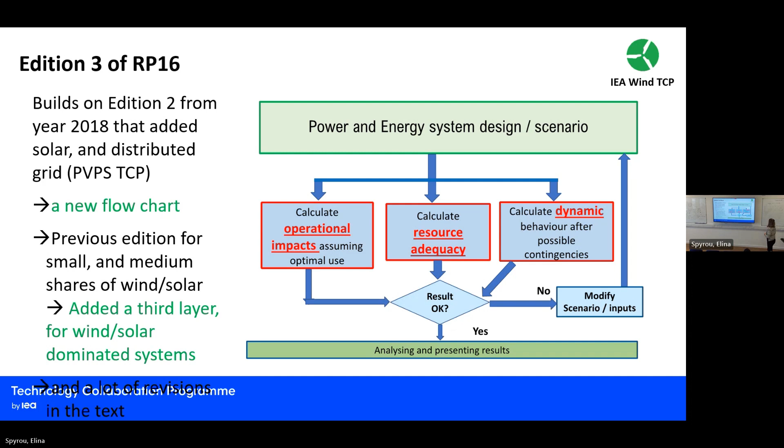Now, would you say you are doing some of, or part of, these boxes in your research? Yes. Are you doing operational? Dynamics, yeah. Resource adequacy? Anybody doing that, or no? Yeah? Okay. And are some of you actually doing more than one box? Or, usually I would say students would focus on one of these when they make their research. Also doing a bit of linking dynamics with steady state operation. That's right, so yeah, that integrated approach. Yeah, yeah, that's right.

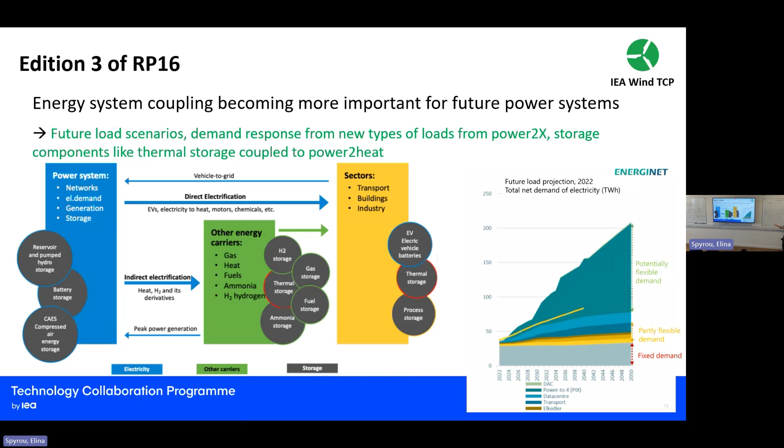And this is just a picture from Denmark, where they look at how they see things towards 2050, and how their demand, which is now quite small, less than 50 terawatt hours a year, will evolve. They just put: okay, most of the current demand is fixed also in future, and some of it is partly flexible. But a lot of the new demand is potentially really flexible. It is only potentially, because we need to check. Data centers are a bit of a problem to really push to be flexible, whereas many others, like hydrogen derivatives, will probably be operated so that when there's scarcity of wind and solar, they will not operate. So it's a different type of thing.

And then another thing generally is that we have these model tools that are quite different.

If you try to model something for policy and planning, and then move toward techno-economic plant performance and unit commitment—which is normally what these studies do—they are somehow linked to the policy targets, checking whether it works out. Then you go to network power flow and system stability, and often we see at least some linkages or inputs coming from the higher level models. What we don't see so much is a feedback coming from the more detailed studies back up.

System stability linking to power flow, the steady state, is being done more and more. But actually going back to, for example, capacity expansion tools to check that a scenario had feasibility issues, and then going back—this is something that needs to be done more when we have higher shares of wind and solar. Or jumping in a different way to say, okay, for stability reasons you need to change your policy. Maybe in future.

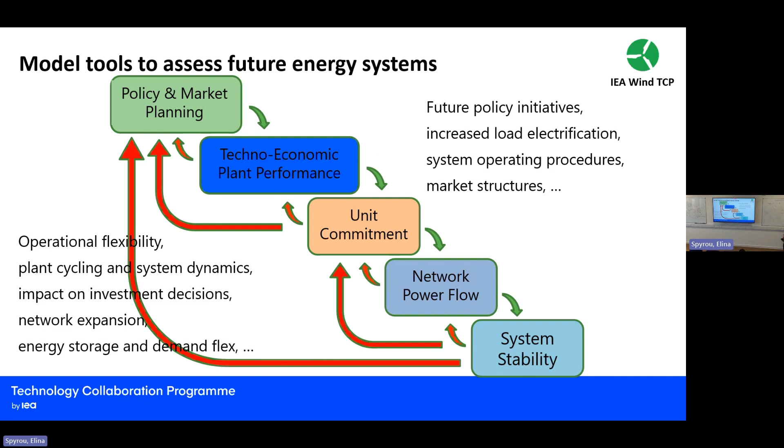Okay, then I'll start going through the recommendations. There's a lot of text and all this, but just for you to see what's in this report.

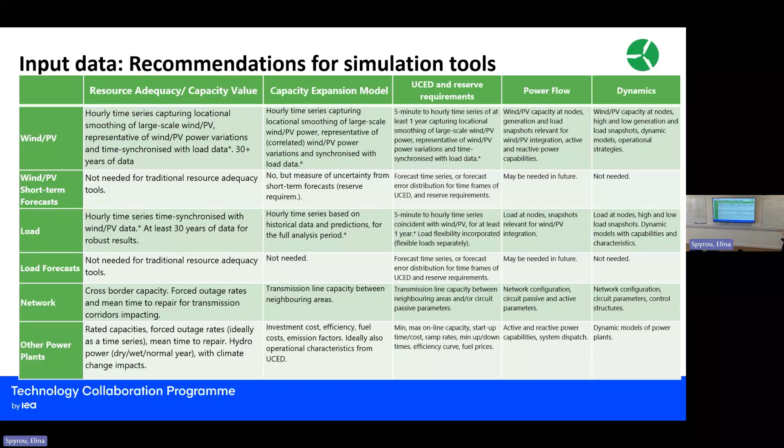We've added a note this time about climate change when you model, because it's not just wind and solar—it's hydro data, and also your load data, anything that is weather dependent in future. There are already efforts, and many people saying that when you model just 10 years ahead, you need to look at climate change. However, there are also many people saying there are still issues with this model data.

We know quite well now—we already have existing aggregated power system level wind data for the time series, for the forecast time series—that we've checked, so we know the smoothing impact for example for wind. But for future climate model data, we don't know yet how well it produces wind and solar data. So we just say, don't just jump and trust the climate data. Be a bit cautious, and also run simulations with the best possible data you have now, without the climate change impact, at least so you know how you go.

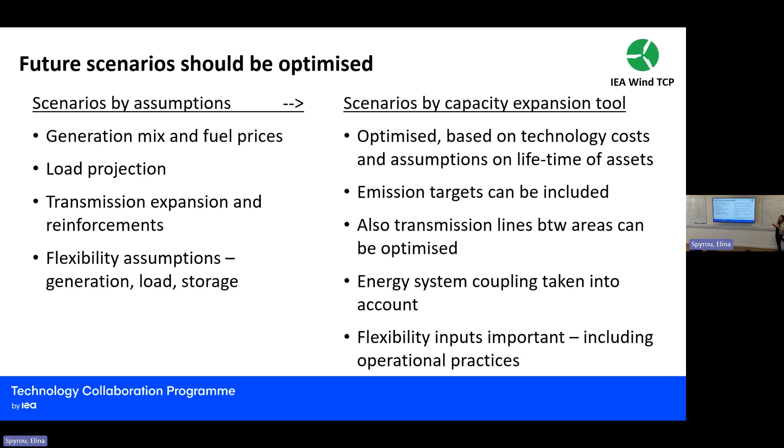So generally we recommend, when you set up your scenarios, that if you just have a small amount—most European countries have wind and solar already, but if you go elsewhere in the world, there are still countries that are just starting. They are doing their first studies: what are the impacts of wind and solar? They are adding smaller amounts of wind and solar, just short term, for example looking at how it will be in a couple of years. So then it's okay, you just add it to the existing system, just make the foreseeable changes.

But as soon as you start getting larger shares, you need to change something. It's not just having this system plus wind and solar—you also need to change the remaining system. And then you start seeing the recommendation for capacity expansion tools. If you have a future wind and solar dominated system, you just need to use those, because the systems to study will be very different.

And also new electrification happens at the same time, and IBR, inverter-based resources, have changes needed in the system as well—all due to reduction of synchronous machines. There will be changes needed, and then this energy system coupling will come. And then also you really need to do all the different checks of operational resource adequacy and stability to make sure that your future system is feasible.

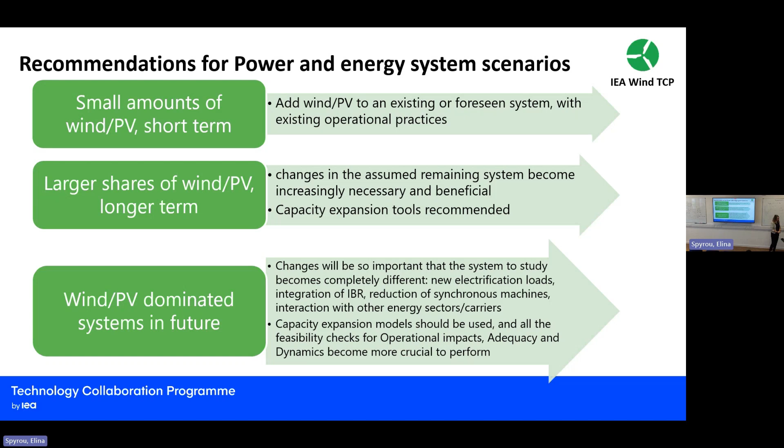Okay, so this was the main thing.

And now I have chapters on the main feasibility check. So this was a lot about how to actually do the scenario and what you need to think about for the input data. So first, here is the resource adequacy.

Resource adequacy is a term that often people think includes both capacity adequacy—generation capacity adequacy, including storage—and the transmission adequacy, the network adequacy. Some people think it also includes flexibility adequacy, so it can basically include everything.

But the model tools that we have traditionally would look more about the metrics and methods to check that your generation capacity is sufficient, and then it's really looking cross-border.

It's not that we can't have island systems, but very many systems do have interconnection capacity. So this is also relevant to take into account, as well as cross-sector impacts, not just electricity.

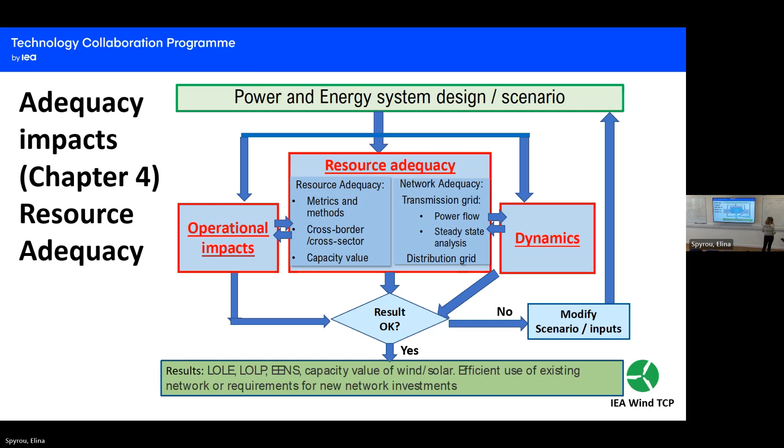Just cutting this very short of the chapter, this is the kind of recommendation list that we have for resource adequacy, mostly looking at the generation capacity adequacy.

First of all, your results will be extremely dependent on what you assume of neighboring areas. This is what we have seen from the study results that we have looked through. So if there are import possibilities, it's always the question—if I include all of those possibilities, it's overestimating. And if I don't include them, then it's really underestimating what the real situation will be.

But you can try to do it somehow, either including forced outage rates or really looking at the times of generation scarcity more in detail with a larger area. Here we are also moving from traditional loss of load probability calculation to actually running unit commitment and dispatch with Monte Carlo.

One other thing is the interannual resource variability. So you need a lot of years of data to be able to do this. We had a nice example from Ireland a long time ago where they actually showed that after you included 7 years of data, no matter what 7 years you took, you get about the same results.

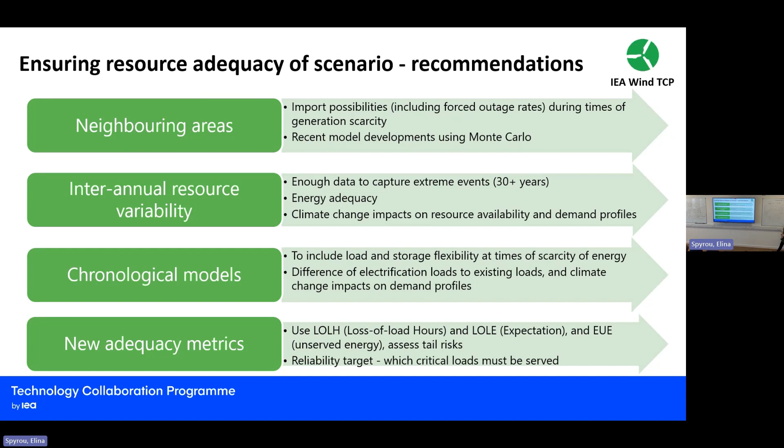So Europe is here—I actually have this European example. ENTSO-E is doing this resource adequacy assessment in Europe so that they include all the neighbors. They look at the whole of Europe.

They do this every year and keep improving. They have the database with wind, solar, hydro, temperature, and market coupling with net transfer capacities, going towards flow-based as well. They have the demand for different countries, and then they run these in Monte Carlo simulations to check how it looks for different countries inside an interconnected system.

But I don't think anybody else does it as well as Europe. Europe is really pushing this, and I think this was also a policy push, because if all the different European countries did this separately, we would over-dimension all the systems. We would have a lot of extra backup, probably resulting in fossil-fired power plants not being taken out, just kept alive, paying them extra or even running them extra. Then it starts conflicting with European emissions targets. So that's why I think this is a really great thing Europe is doing, but other parts of the globe don't really do this yet.

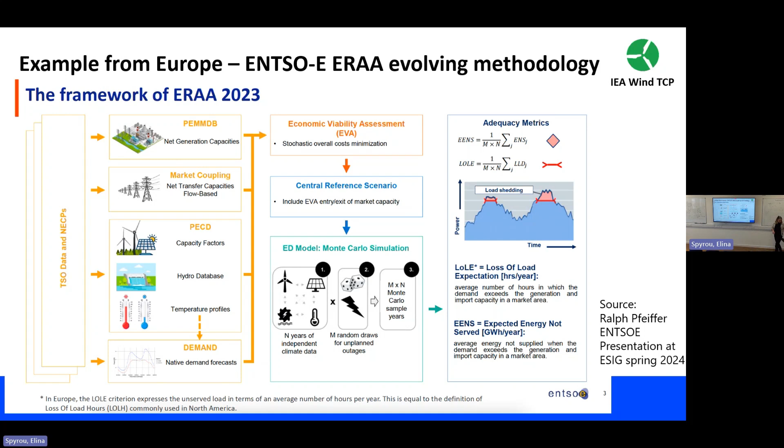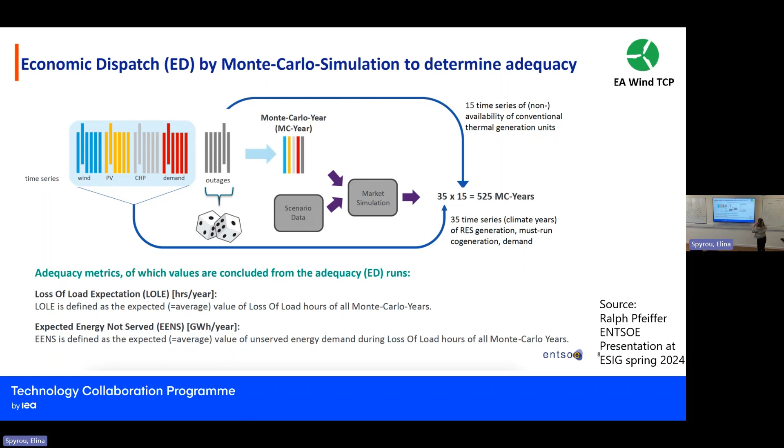Yes, the metrics are still calculated. Even if they study this, they do the simulation. This is more like how they do it: they have the time series, they have the outages, which is the Monte Carlo part, just at what time the forced outages will happen. And then they finally have 35 climate years and 15 time series of non-availability of the thermal generation units. And then they get the adequacy metrics.

So the results look like this. Every country has these different metrics: loss of load expectation in blue, loss of load duration, and then they also do the P50 and P95, the 50th and 95th percentile - a one in two years event or a one in twenty years event. The one in two years event is in orange, and in gray you see the one in twenty years event, when several countries start having problems with the numbers. Here it's something like 50 hours on average per year when you include this one in twenty years event in your data set.

So even if you model it, this means all these countries have modeled it taking into account the neighboring countries, and then they see what the problem is in their own country, because the simulation will see scarcity happening in other countries at the same time, so there's no market that would allow power to flow to that country.

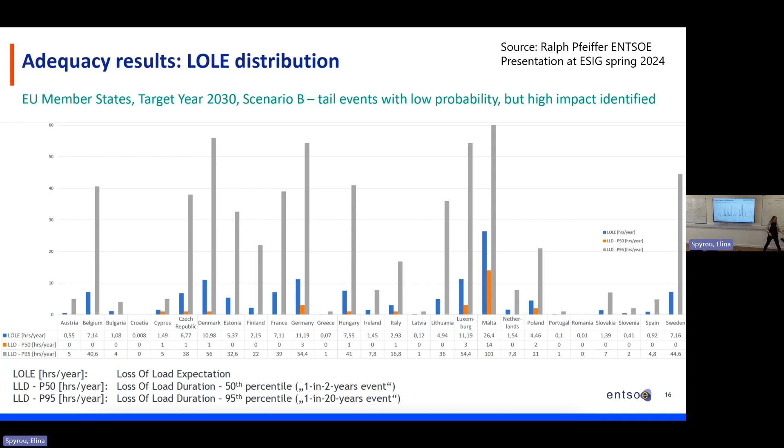One thing is that ERAA is not a binding document. The fact that ENTSO-E is modeling it doesn't really enforce any specific actions from the member states. The second comment is that it's also extremely compromised because this is a European Union level document, not a pure academic study. It includes a lot of compromises so that the capacity expansion and transmission expansion recommendations fit all the member states. Behind the scenes, what I heard is it's extremely difficult to obtain that with a pure model run. The beauty of it is that we have one document encompassing all member states, but the drawback is we have to satisfy the needs and reach agreement across all member states, which is usually extremely difficult.

I think one thing where Europe is trying to reinforce this methodology is that if a country says we want to have a capacity mechanism, for example we want to pay our coal or gas power plants extra, they have to prove that the calculation is not just for their country as an island, but for the country taking into account its neighbors.

So they are sort of pushing a European-wide methodology if you want to do different policy in your country. So somehow I think they are still trying to link it, but sure, it's work in progress. And thinking about it, they do this every year, and they always see that.

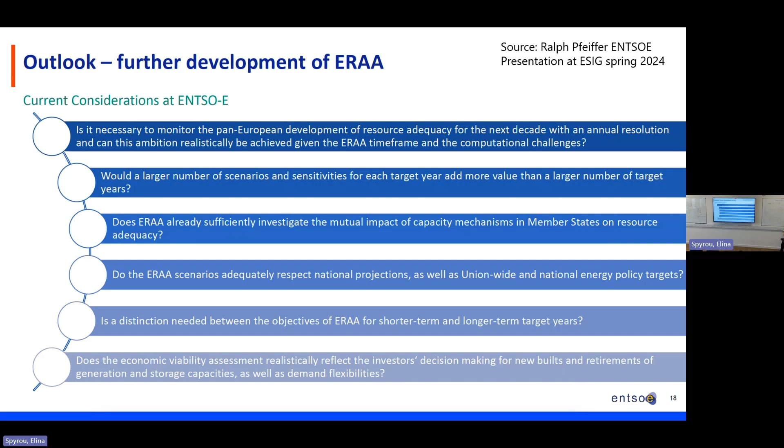And then related is when you start looking at capacity value. So basically you do a similar calculation and check that adding a marginal amount of wind, what's the benefit? How, keeping the loss of load probability the same, how much load you can add. That megawatt number is the real benefit that this marginal addition of wind and solar will bring. And of course, this is really system dependent. If anything changes in your system, you need to run it again.

And also, as it's more and more wind and solar, of course they will eat out this benefit because they are so correlated. So adding more of a correlated thing, you can't get more value after some point, or you get very small marginal value after some point.

And there has been previously this ELCC method, effective load carrying capability. So you calculate the loss of load probability, and then you add wind, and you see how much load you can add with wind to keep the same loss of load probability. So that's like the method.

But this is okay when you look at smaller amounts of wind. When you start having higher amounts, you need to use other types of Monte Carlo methods, so chronology. So the same things actually come up generally about resource adequacy, also when you look at only the capacity value of wind.

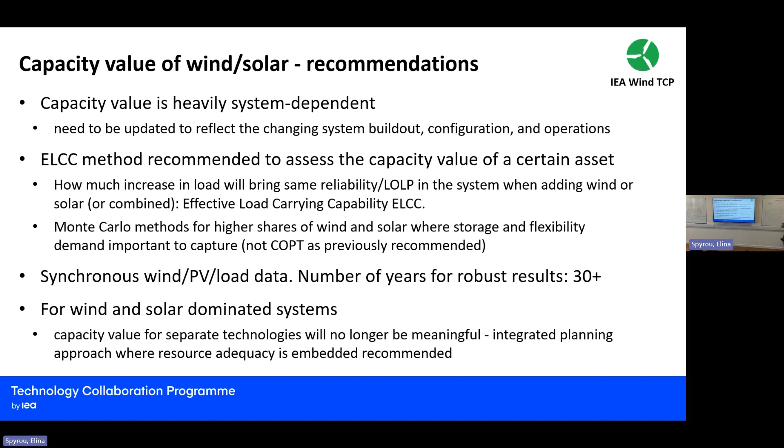And at some point, I don't know whether a capacity value for separate technologies is meaningful anymore. So I don't actually know whether these studies are even being made anymore in Europe, for example. Are we already past this?

For transmission planning, there is not very much in this report, so we just try to highlight some things, because transmission system operators do transmission planning and will go through and make scenarios. They check that the scenarios have resource adequacy and that they work operationally, and then they see how much transmission is worth building. They need to make a cost-benefit assessment to prove that it's really worthy of making this investment. And usually for a lot of wind, it's always economically beneficial to build more transmission because of the smoothing impact of wind.

And it looks like for solar it's pretty much the same, because it does help for solar integration as well, even if solar is more concentrated on the same hours of the day over a large area.

So we basically try to bring out a couple of recommendations, like you need more scenarios than you used to do. They did a lot of things just looking at high load and low load situations, winter and summer situations, just a couple of snapshots to check it works. So now it's getting more complicated.

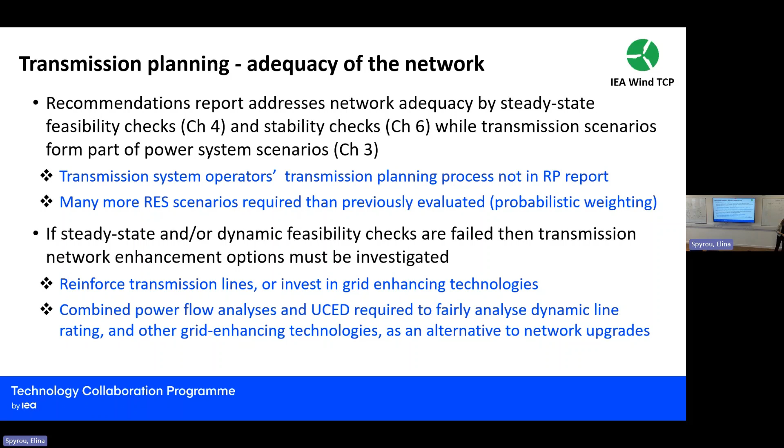Here are just some recommendations from this part.

You would need to check the power flow cases to study with snapshots. You would need to look at the statistical relevance of the cases and really capture the variability of the year with dispatch decisions, how wind and solar will impact the dispatch decisions when checking what snapshots to look at, or even in many cases you would do it for all of the hours.

And then you would have the deterministic steady state setup, the power flow analysis to look at whether there are bottlenecks, whether the voltage profile is okay, and you need to do a bit more network modeling improvements to really analyze some of these grid enhancing technologies like dynamic line rating.

And then for weak grids, often here you would also do short circuit level analysis. There are currently more and more of these tools available, like screening tools, looking at the grid strength across the network. So grid strength is also becoming more relevant, it's not only the stability part, but also coming into play here.

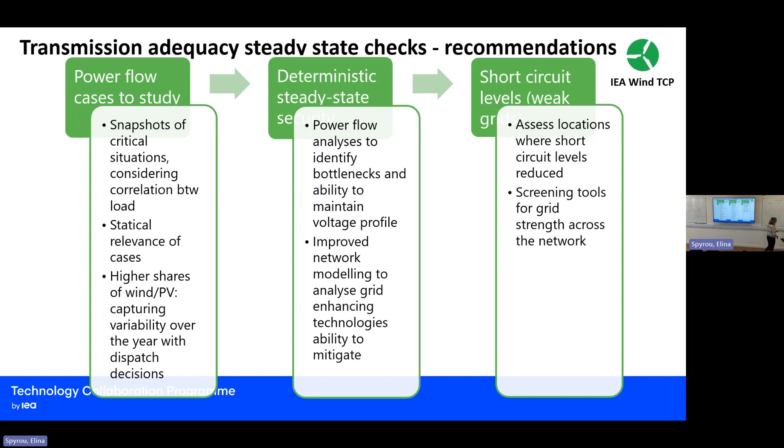I think mainly it's like whether you would need to go back in the beginning to modify your inputs, or whether you would do it between these boxes. But there can be many ways to get it right, or many iterations that you would need to do if you want to have the whole picture actually.

Well, what changes we need to make - so for example, if the loss of load probability becomes really high, you need to go back and add either peaking capacity, backup capacity, or add storage, or add flexibility in your load. And then check whether, or if you start seeing that, hey, when you study this scenario there will be huge bottlenecks here and here, then you can check whether the grid enhancing technologies work, and say okay, with these things it's okay. Or then you go back and say the transmission grid needs to be different. So this is one way of doing it.

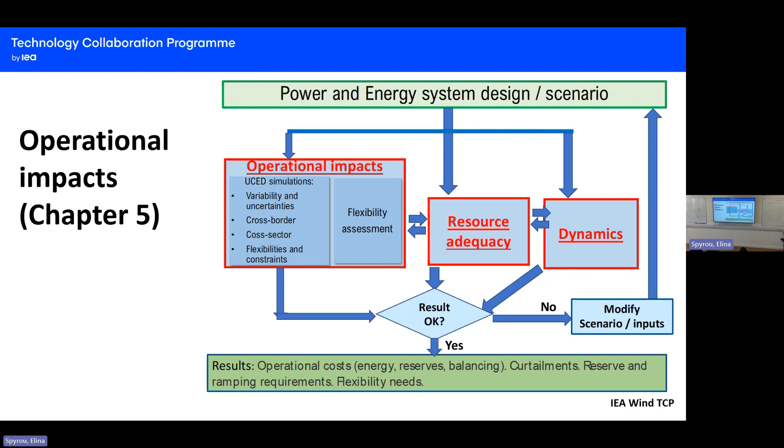But at least you say it, instead of just saying we made this scenario and it just works perfectly. So then the next thing is to ensure that the scenario is operable. That has a lot to do with flexibility, looking at the variability, the uncertainty, the forecast errors, and also having some extreme events would be good. Then you would have a unit commitment economic dispatch tool to really simulate the impact of wind and solar on the operation of the other power plants. And what we see is that these results are very sensitive to base case selection. So if you want to study the impact of wind and solar, what you've chosen as your base case reference will pretty much determine your impact.

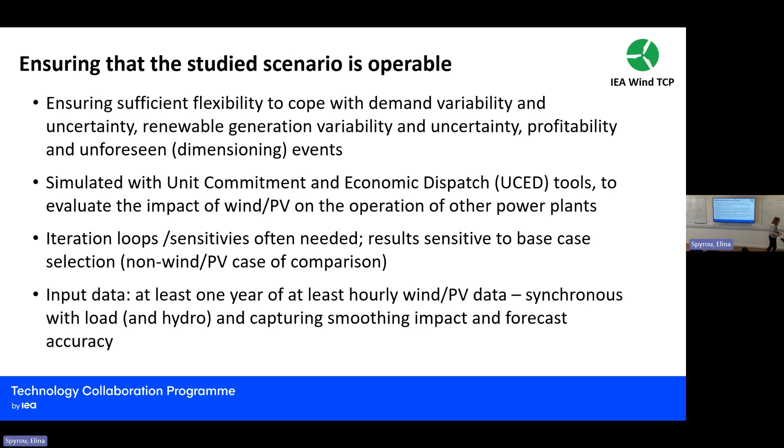So basically, if you see a problem with wind and solar, and you go back and iterate, making changes in your operational practices, changes in your flexibility assumptions, then you can make it work. This is often done with one year of hourly data in the past. In future, it's better to do it with quarter-hourly or 5-minute time resolution, and also having several years that have, for example, a high wind year and a low wind year, because this also has impact. If you just take an average weather year, you will not see all the impacts.

So basically, for managing your variability and uncertainty, you can do it partly by scheduling. The variability between the time resolution intervals, like if you go from hourly to 5-minute, you capture a lot of the variability by having faster scheduling and dispatch. But you always need to have operating reserves there. If you have shorter scheduling intervals, you need less operating reserve. If you do hourly dispatch, then inside the hour, you need a lot of operating reserves to deal with what's happening inside the hour.

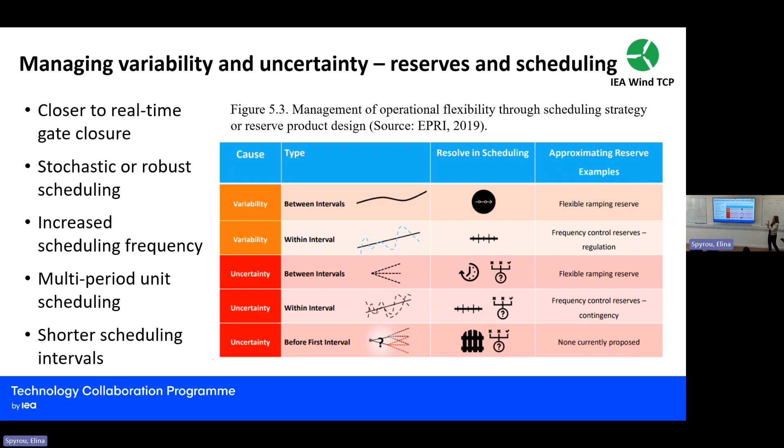I think this is trying to say that these are linked, because the starting point often for a wind integration study was to say how much wind will impact the operating reserves -- we need to carry more operating reserves when we add wind. But it's not just about that. It's also when you change something in your operational practices, your scheduling intervals, that's also another way of dealing with it. So here again, a recommendation list is provided with a lot of bullet points.

Some of the bullet points are about the time series -- that all the weather-dependent sources should have the same weather year as a starting point, and the forecast uncertainty should also be paired with the same weather. And if you have a lot of hydro, then looking at wet and dry years makes a lot of sense. Then for the base case scenario, if comparisons are the aim of your study -- really trying to capture the impacts of wind and solar -- then the choice of base case is important, and capacity expansion models are needed to make these base case scenarios good.

And then finally, for the unit commitment models, when you have higher shares of wind and solar, you really need to look at the forecast errors too, because often these models are just run deterministic.

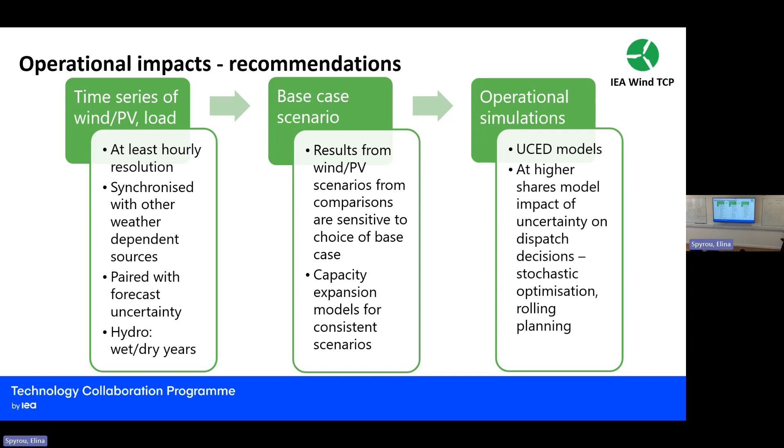But some kind of stochastic optimization, rolling planning, needs to take into account that day-ahead forecast errors are quite big and uncertainty is big, but then when you are closer to the time, there's less uncertainty. So this needs to be taken into account.

And what is really important are the capabilities and limits of flexibility that you want to capture, including the limits. Here neighboring systems are also important. For example, for hydropower, it's often a bit of a problem to model, because they are often modeled as too flexible - they are extremely flexible, but they do have some limits. Then other relevant energy sectors come in here.

Grid constraints can impact a lot, because otherwise, if you have the transmission grid available, you can take a lot of problems out just by that.

And then finally, the operating reserves that you put in your model, you also need to check with wind and solar. But since they are often for different timescales, you need to be sure that you're not double counting, having the same variability impact for different timescales of reserves.

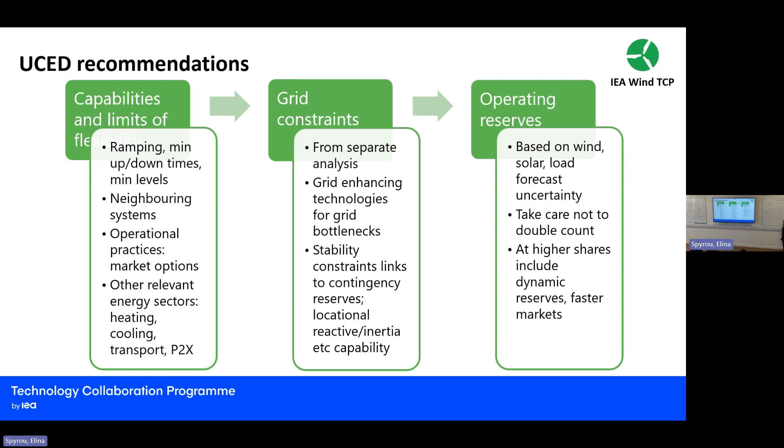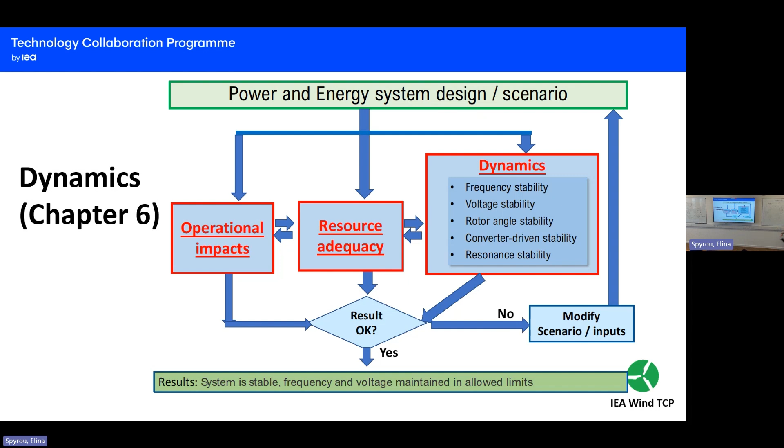And then finally, dynamics. There are a lot of different stability issues, and this is of course power-system dependent, what to study - what are, as a starting point, the particular system concerns that you have? But basically you want to determine if the grid is sufficiently robust. You need to check the dynamic impacts and investigate locationally how it goes. The transmission limits are sometimes set by a combination of different stability phenomena for that system.

And here, optimal measures - also there's often generation curtailment happening that you can have because of these dynamic constraints coming from stability.

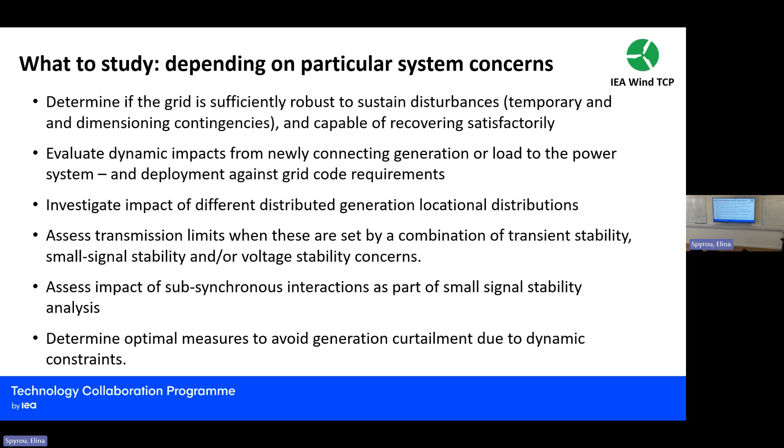So you could summarize this as: for selecting cases, in future systems with a lot of wind, you should do some initial screening. Then based on the unit commitment and economic dispatch, you should take the snapshots. And then all these dynamic models of wind power plants, solar power plants, battery energy storage systems, and also load in future should be suitable for each particular stability case. Then basically decide what stability cases to take.

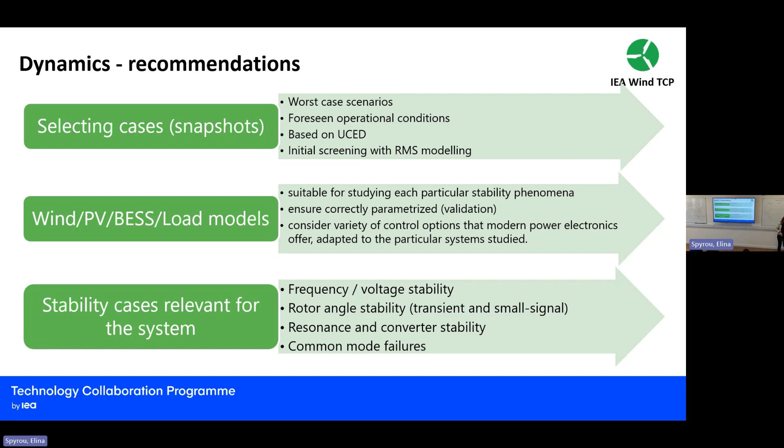So I know I'm at the end of my time. I'm just showing you that there are some other slides because I go through different recommendations for the different stability studies, but not going there now.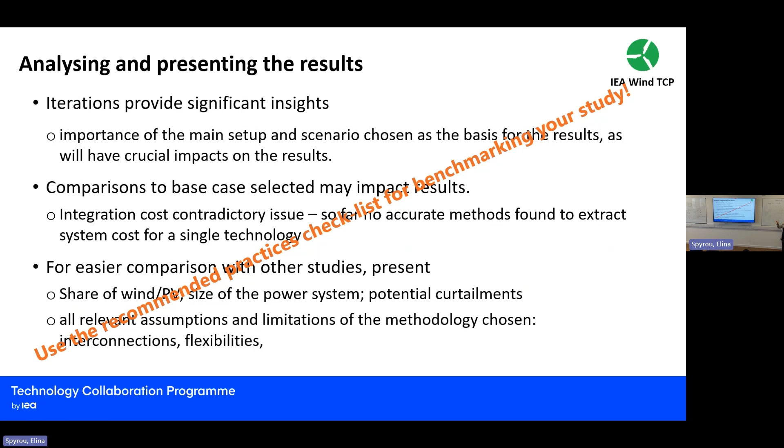And then all the relevant assumptions from these checklists - we really hope this checklist is useful when you make, just for benchmarking, just to say that from this list these things were taken into account. So hopefully this will be okay.

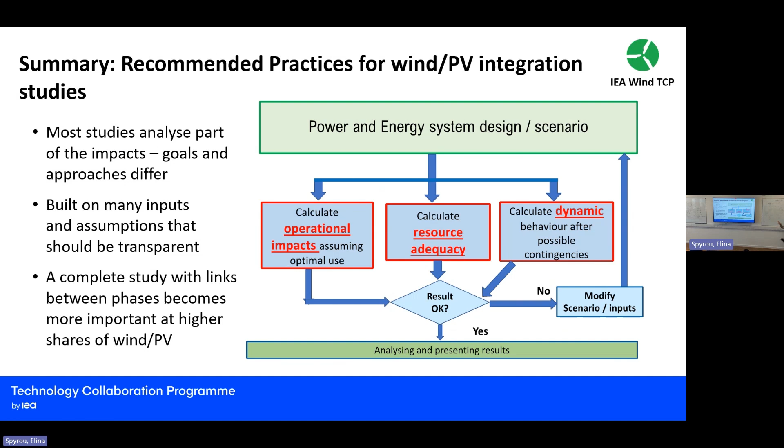And I think by now you know that all these studies are built on many inputs and assumptions, hopefully very transparent. If you have really high shares of wind, then you should do all the checks for your scenarios. But if you have less wind and solar, then you can perhaps skip the stability checks.

This is something about the future: you have large areas, more complexity, your demand and storage will look different, integrated models are happening, and even reliability could be thought of differently in future.

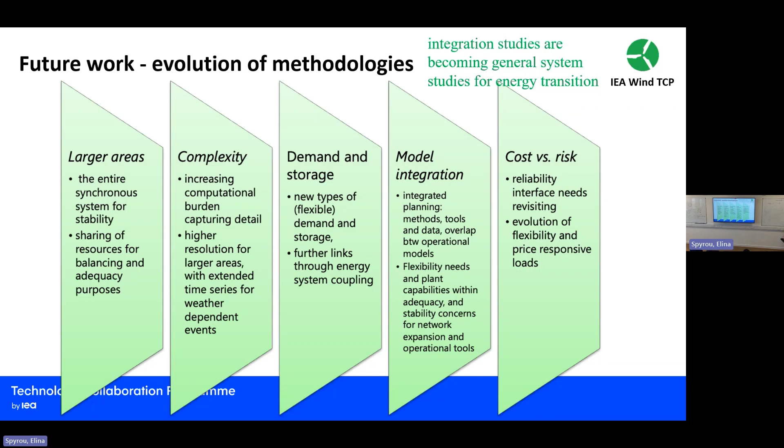So thanks also for posing questions during the talk. I think it's always nicer to present that way. But if you have any more questions...

Is there any recommendation about how to consider interaction with distribution systems? This is something that we were really hoping to get, but I didn't get very good input for that section in this report from the group of experts working here. I think that's also a lot of work in progress at the moment - it's also becoming more important.